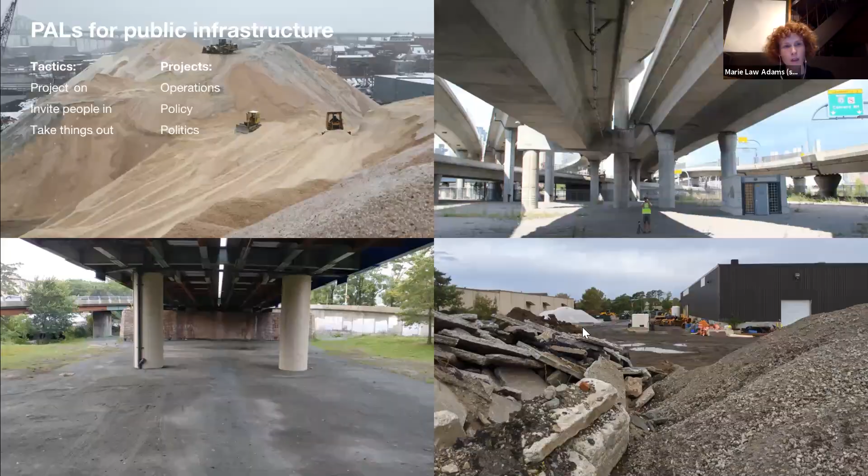Fast forwarding to today, Chelsea Creek is actually still represented with a series of dots, just a lot fewer. These are GPS coordinates also used for navigation, but what they're doing is outlining the profile or footprint of a piece of large scale infrastructure. This is a federal navigation channel, designed to support global scale ships arriving in Boston Harbor, bringing goods like petroleum, road salt, and produce products to the regional community — an example of regional or even global scale infrastructure.

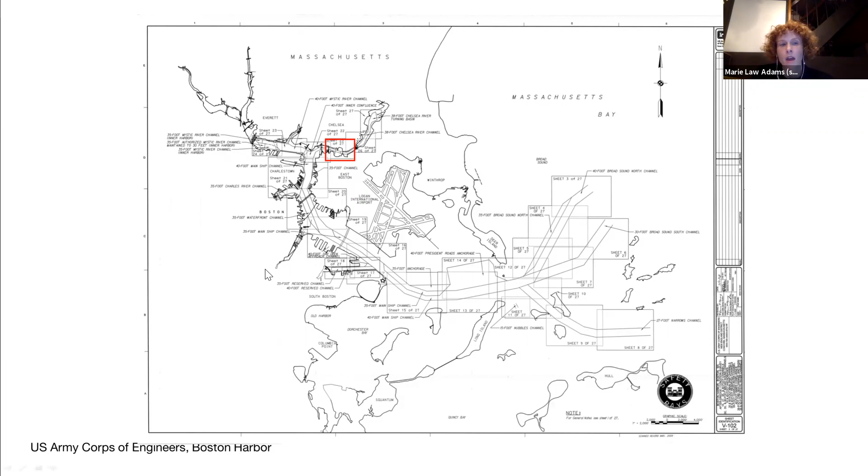This is what Chelsea Creek looked like in the 1950s. Jumping back to more contemporary times, this still has an imprint in the way Chelsea is today. It's the most densely industrially zoned municipality in the state of Massachusetts, with about 35,000 residents and a very large number of immigrants from Central America. It's the second most dense residential municipality and the smallest as well, at 2.2 square miles. Quite tiny. You can see in the image here, all the black figure is the industrial landscape, characterized by wide expanses of asphalt and warehouse buildings, and it entirely runs the edge of the Chelsea waterfront to this day.

Reflecting that either/or attitude I mentioned a couple minutes ago, we found this quote in the local paper years ago that said, 'I have a feeling I'll find out soon what Chelsea will stand for the next 100 years. Will it be residential or industrial? I hope you choose wisely. I already have one bag packed.'

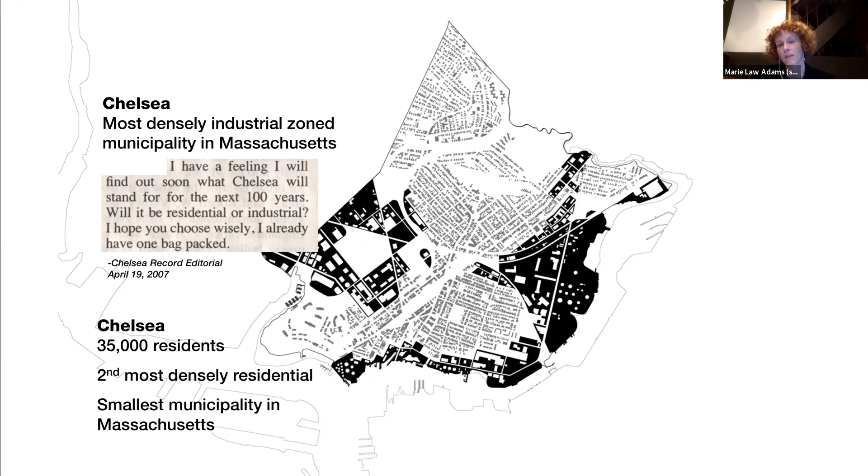This mentality that it could only be one thing, that the public good was really incompatible with industrial activities, is actually reinforced through policy decisions at every level.

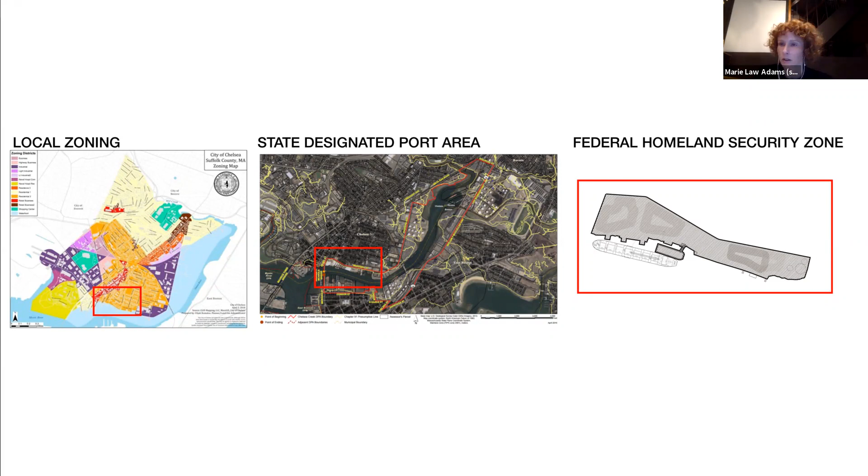In Chelsea in particular, there's a conflict between local zoning, which excludes all industrial activities from the waterfront, and the state, which only allows marine-dependent industries there. The two completely contradict each other, creating a condition where the waterfront is undevelopable. Federal homeland security adds another layer of impenetrability on top of that, which I'll go into later.

What that results in is a waterfront resource that looks like this—it provides nothing for the local community. It's kept in a holding pattern of airport overflow car parking and rental car parking lots, because these uses are a loophole to get around the zoning conflict between the state and the municipality. This isn't doing anything for the public. It's not a heavy industrial use, but it is separating the community from the waterfront.

Narrowing in on a facility we've been working with for several years in Chelsea, you see in the background two really large piles of road salt used for de-icing in the wintertime in Massachusetts. The state uses about 1 million tons of road salt every year for de-icing, distributed across the entire state to local municipalities. In the foreground, you can see a Panamax ship passing through a drawbridge.

These ships are 900 feet long, the size of more than 3 city blocks in Chelsea, which is a very old city for the United States. It's something that completely dwarfs the scale of development around it.

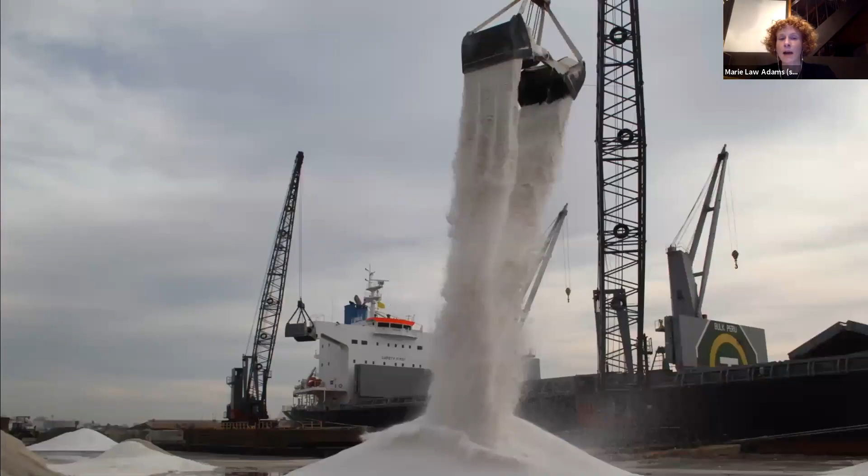Here's the ship again passing through the drawbridge, being tugged into the berth at the salt terminal. This shows the process of unloading the ship—cranes take the salt out of the holds and drop it onto the dock, creating an extraordinary landscape, sort of a moving mountain of minerals, which you can see here.

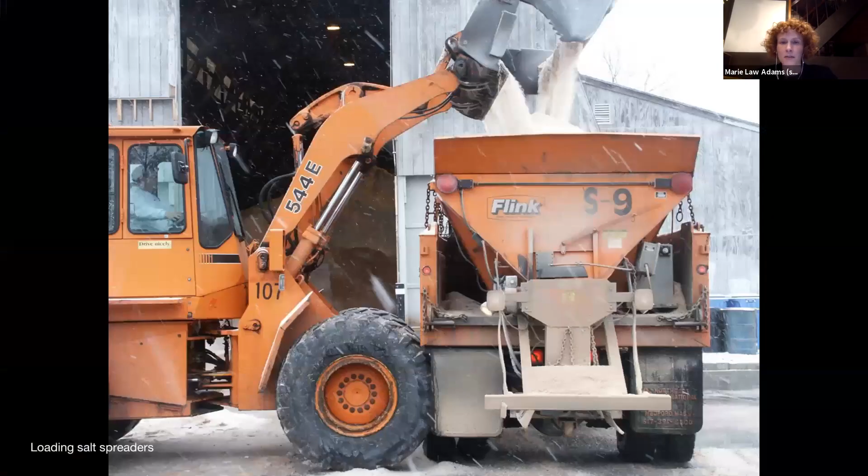It's a very fluid thing that changes with the weather—with every storm it either rises or falls. This salt is then stored and put into trucks that go out and spread it onto the streets during winter storms.

When my partner Dan and I first started working in Chelsea, we realized this kind of industrial operation really heavily shaped the community's relationship with their waterfront. It had a big impact on how people live in their public realm, but there wasn't any dialogue between the industrial uses and the local residents.

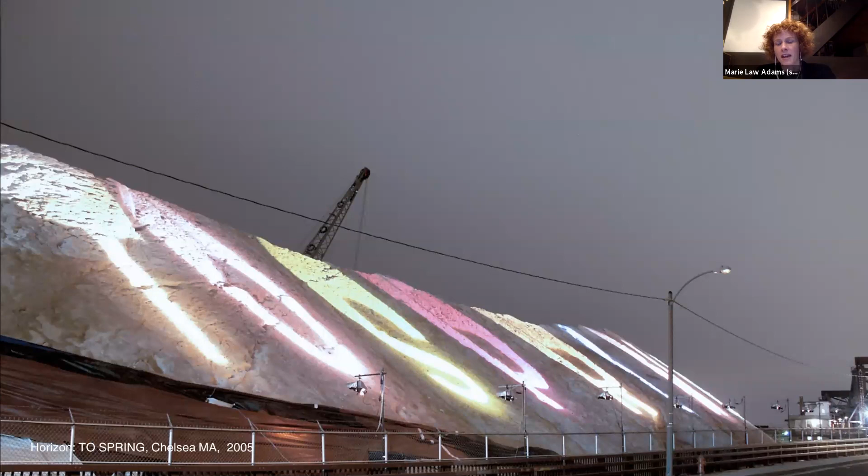Something that anybody could engage with. And then you see here the kind of 'to spring' projection, marching on to spring, which disappeared after a late snowstorm—kind of just demonstrating that kinetic nature of the salt pile.

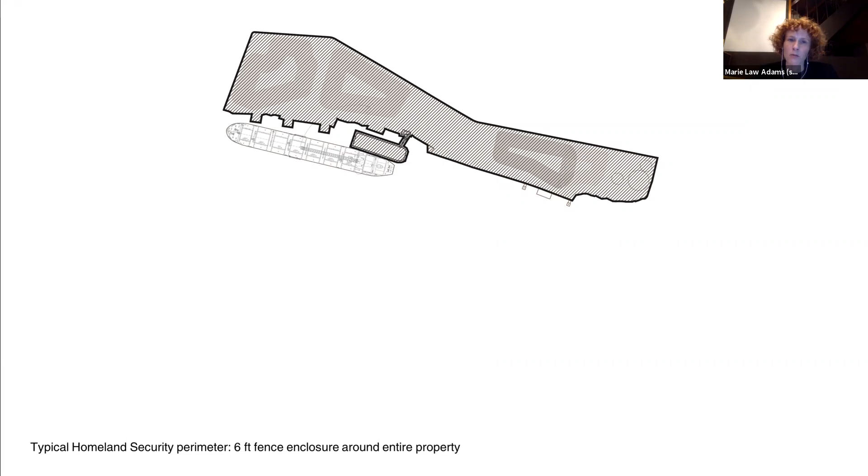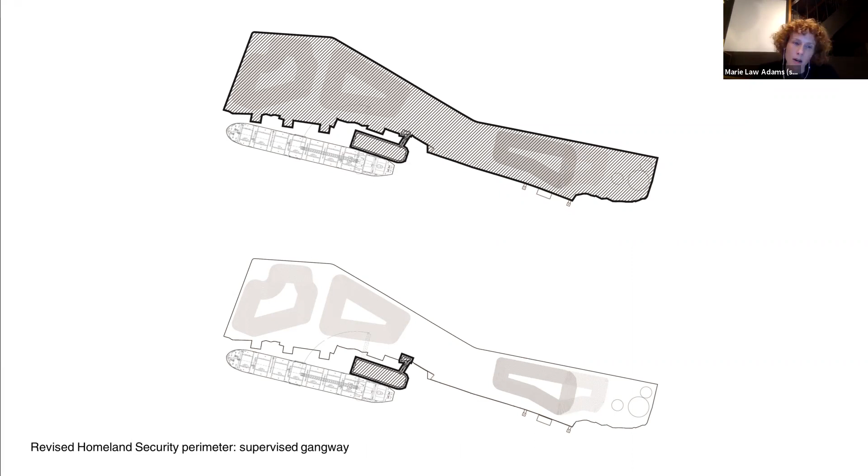So we worked to really target: what's the real security concern? We were able to reduce the security perimeter, which would have been a 6-foot-tall fence around the entire facility, to something about 1/25th the size, which opens up almost 10 acres of new space on the waterfront that anybody could walk into. There are still gates and fences, but it creates the possibility that the public can occupy this waterfront. These are the drawings we used to negotiate with Homeland Security to do that.

This is the design intervention: incredibly modest, a shed with a window in it that allows a security officer to view the gangway leading to the ship, and that's it. All they need to do is monitor who's coming on and off the ship. That then opens up the entire facility for different uses, making the dock itself available for public use.

So there was a high school senior dance that took place on a harbor ferry one year, a teacher appreciation cruise another year, and the local Boys and Girls Club can come and visit to see ships docked at the waterfront.

So all of a sudden, opening up this space for something that the public can take advantage of when they live in such close proximity to it.

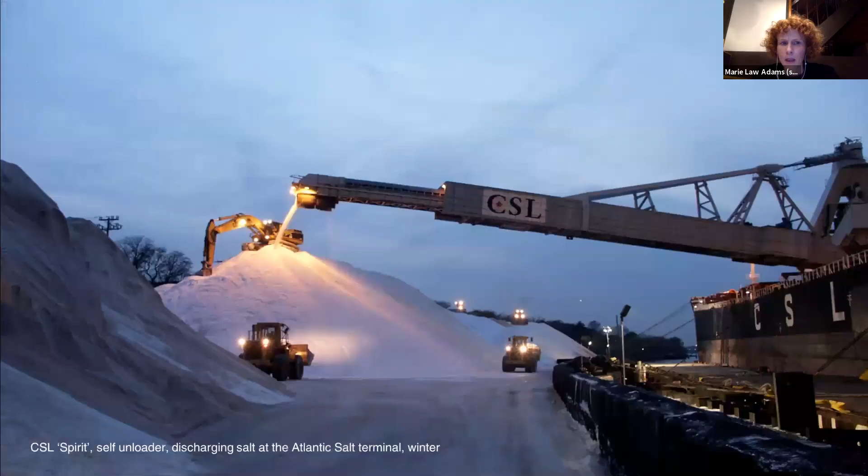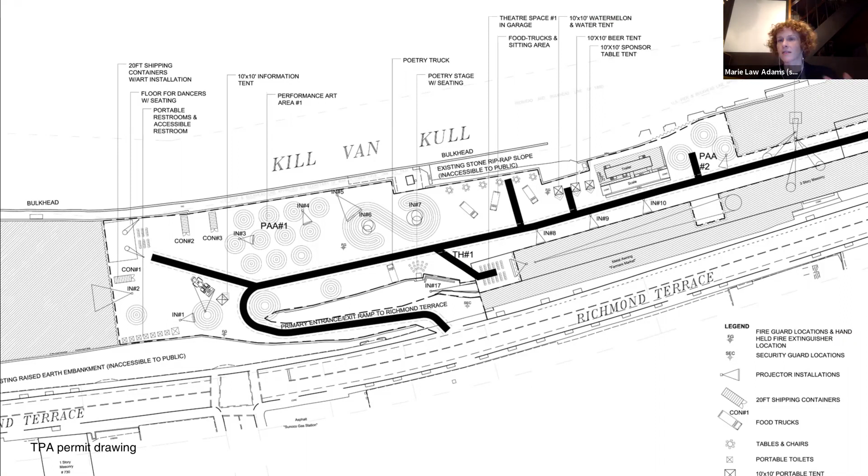So one of our early projects that became an ongoing event, which we worked on with Staten Island Arts, an arts organization in Staten Island, was to design the Lumen Film and Performance Art Festival. We took advantage of the seasonality of the industry to introduce new uses and activate the space in the summer months. This is a permitting drawing showing different configurations of salt piles and art installations that happen at this one night event, which we did for multiple years.

One of the first things we do is account for the scale: it's a half-mile long facility, a really, really large space, and it's quite dark at night. It's not designed for typical urban activities as a working waterfront. So we try to highlight the space with light and create a way of going through it, using lighting cues to illuminate all the different industrial buildings and artifacts like the crane you see here, and the smoke tower.

Sometimes the artists themselves begin to incorporate their work with the industrial equipment. This is a front-end loader being used for a projection. We work with the salt terminal to bring in shipping containers that serve as smaller scale galleries and more intimate spaces for screenings. Even the industrial equipment itself, when illuminated, starts to become things that people interact with—they take pictures with them, they climb on them. It's an opportunity to get close to things that a lot of people don't get to in their everyday life.

We had been doing this event for a couple of years, and then one summer there hadn't been very much snow at all, and actually there was still quite a bit of salt left on the dock in the summertime. That caused us to change the approach—it became more than just creating an infrastructure of new lighting to invite people in and allow for art installation work. We actually started to use the salt itself as a material for the art installations.

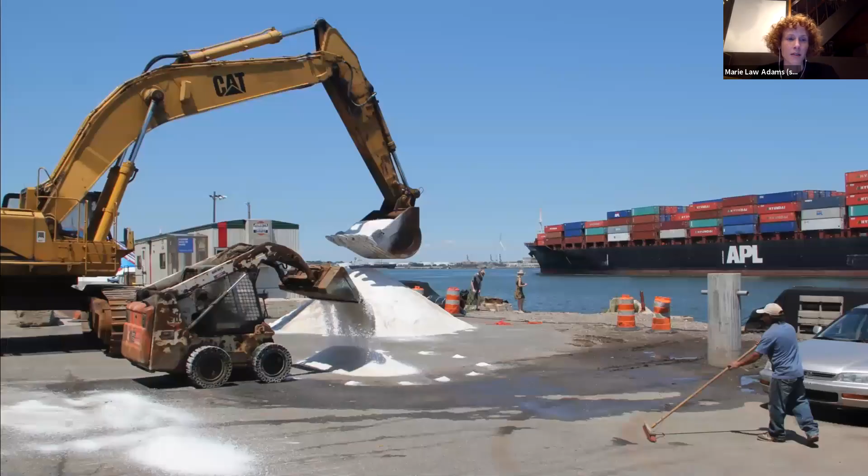We worked with the labor force of the salt terminal to lay these shapes out on the ground—they used little hand piles of salt to mark the areas, then built them with the equipment they use in their day-to-day industrial activities. The artists themselves started to work with the machine operators to create site-specific works incorporating the salt. You see an artist here directing a couple of the salt dock workers to sculpt a pile.

Here we have an artist who used the pile as a pedestal for a performance. In this case, it's used more as a gallery and performance space to create an enclosure in an otherwise really large dock.

Some artists also incorporated the salt as a material within their work, like the one we saw where the artist was working with the dock operators, using the material as a projection surface. By the end of the night, the piles themselves get beat up as people climb on them to view the works from different vantages. It's a very friendly material to climb on, and kids come in and make their own installations in the space.

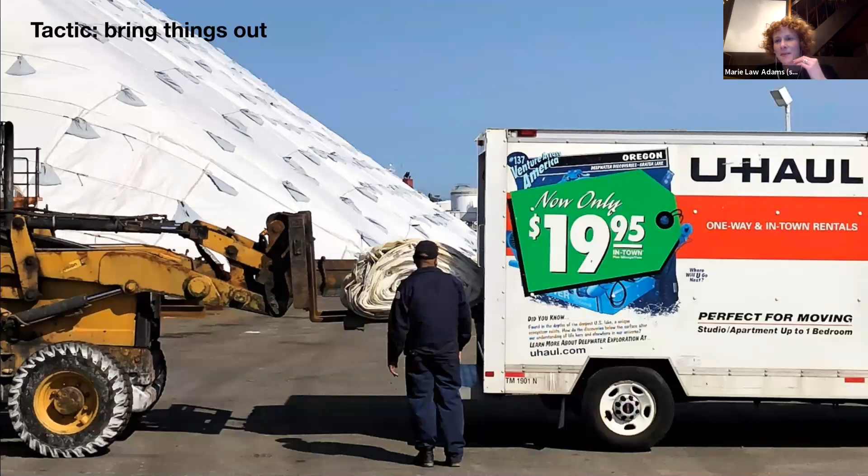The next tactic I'll talk about is bringing things out. This was a fun project we did a couple years ago. We were invited by the Architectural League of New York to design the environment for their Beaux-Arts Ball, a one night party event in New York City where all the local architects gather. Every year it's in a different location, and the installation lives for only 4 hours—a very short-term, fast installation. The theme this year was called Vector, about flows of materials, information, and people.

Our work fits into this category because a lot of what we do is with logistics and that sort of thing. So this was the building we were given as a site.

It was really just characterized by a 300-plus foot long hallway. You can see the beams on top of the columns there—that's a gantry system that used to be used to unload rail cars. This was the Brooklyn Navy Yard, which used to be a more industrial building and is now used for other things.

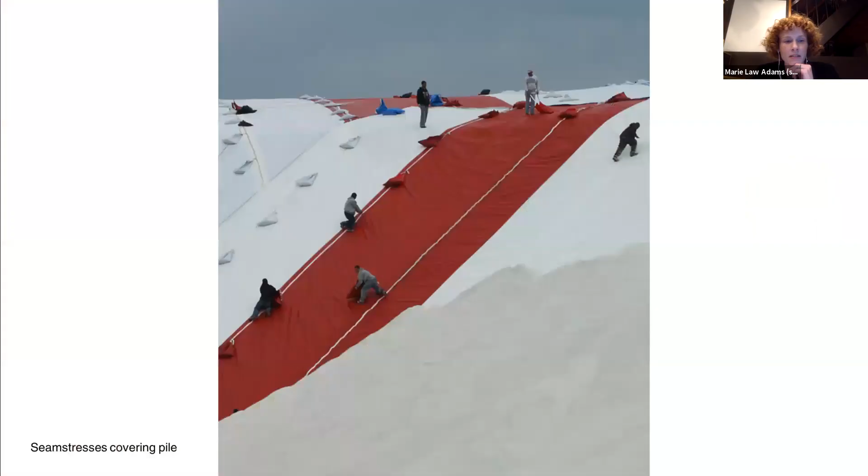This is what we looked at for the installation. We were inspired to use the industrial materials we use in our work with the salt terminal, specifically the tarps used to cover the salt in the summer months. You see here seamstresses who come from all over the country every summer to stitch by hand with handheld sewing machines the tarps that cover the salt when it's not being used.

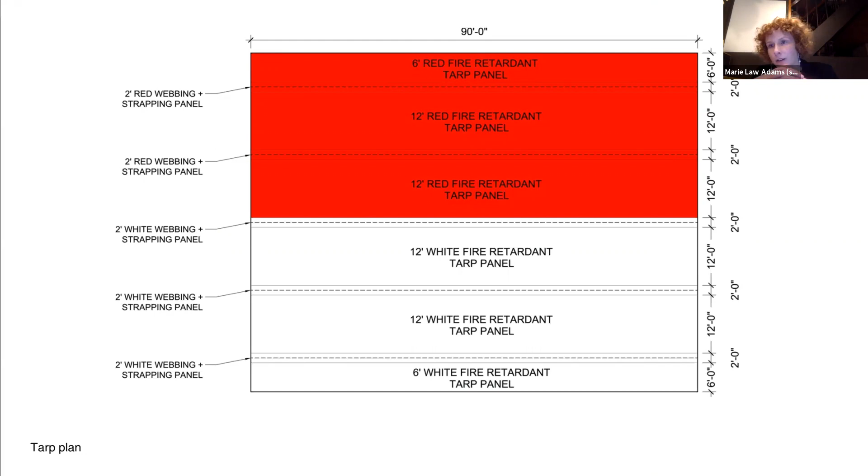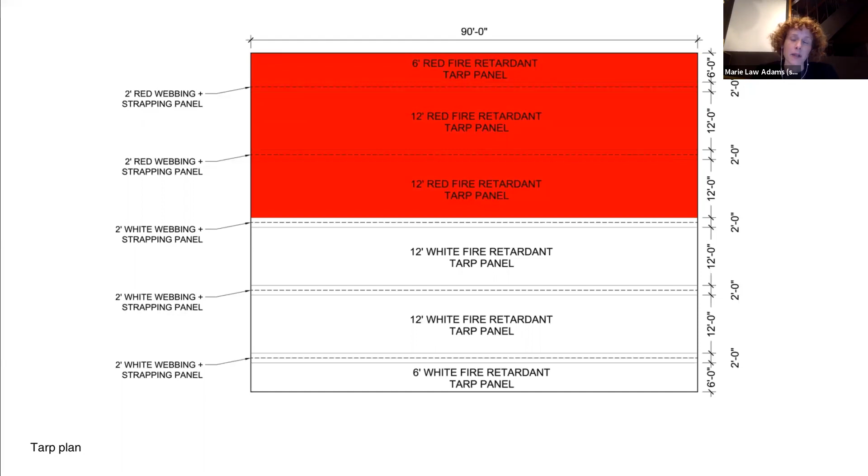We worked with the salt company to special order tarps in the red and white colors they often use. We were able to specially order fire retardant tarps, since these same materials are used for covering coal piles as well as salt. We had to order them half the size they typically use because one of the biggest hurdles for us in doing this installation was the sheer weight of the fabric itself—they were 300 pounds each when rolled into a bundle like this.

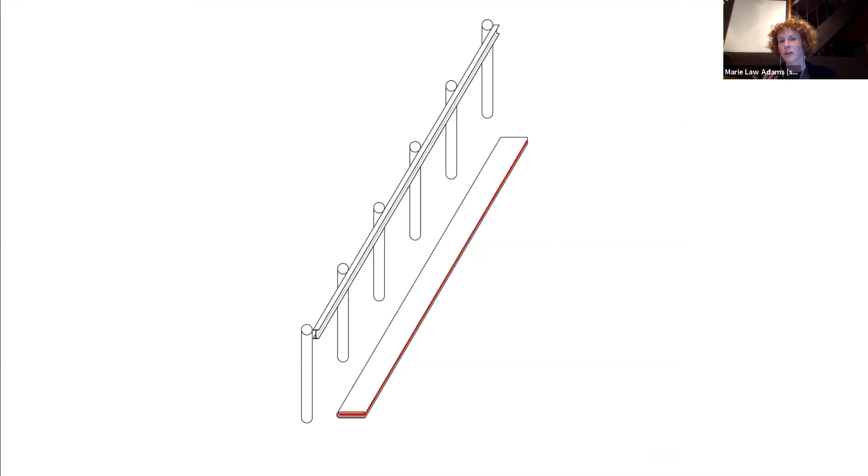So we used large scale models in our office to understand what shapes and forms could be used with these tarps if brought into this really long hallway space, but also to physically figure out the logistics of getting them in and moving them around without the aid of the industrial equipment typically used in the process of tarping a pile.

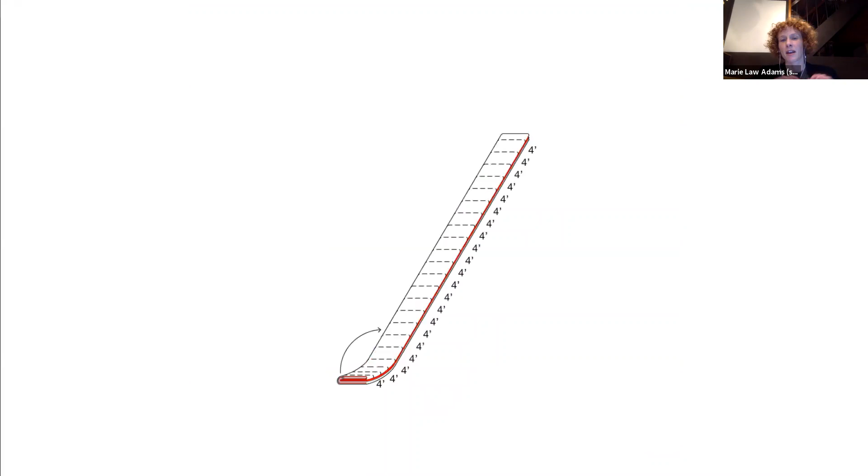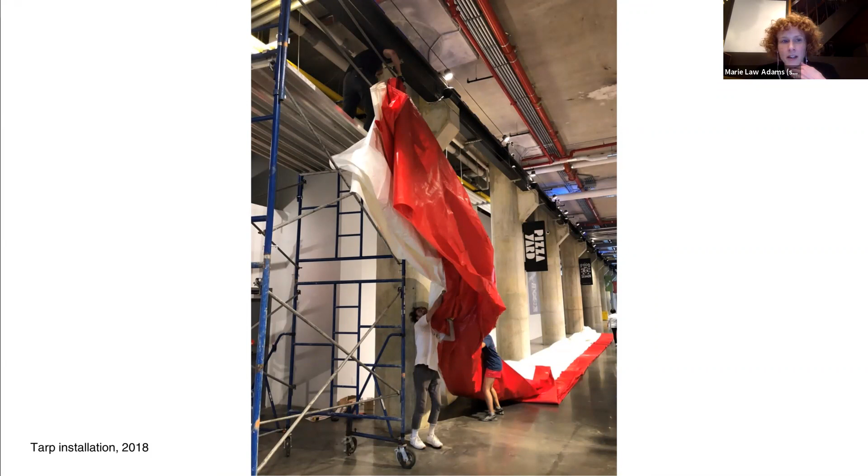We came up with a strategy of how to unroll the tarp down the hallway, unfold it, and lift it piece by piece, attaching it to the gantry system to create a new context. You see the installation process here—some of our team trying to hoist the material up.

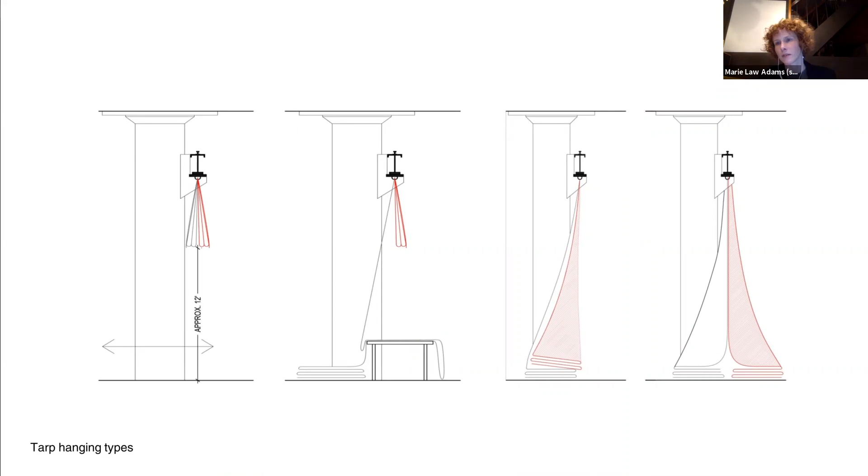We had this hanging detail that connected the tarps to the beam of the gantry. The design became about developing a vocabulary of different ways of hanging the material that responded to the constraints of the space, in terms of life safety systems—all of the alarm strobes, annunciators, and egress doors had to remain functional and visible.

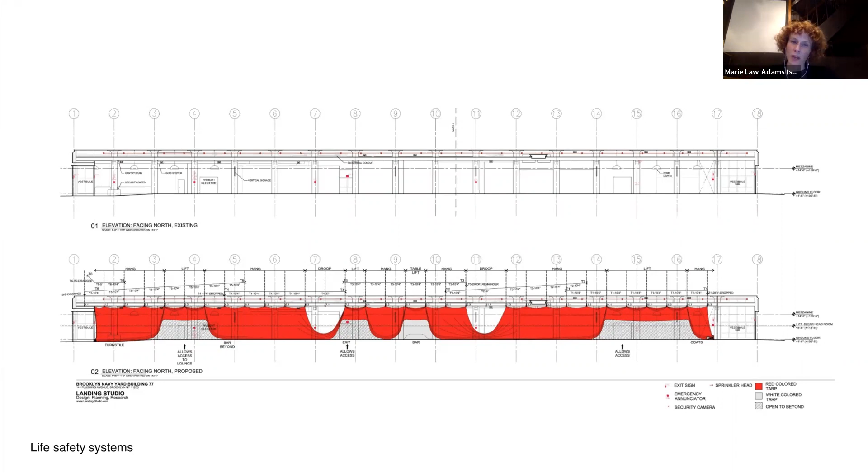And we really liked the red and white in the sense that it could really take different qualities of light and create a whole kind of glow in the space.

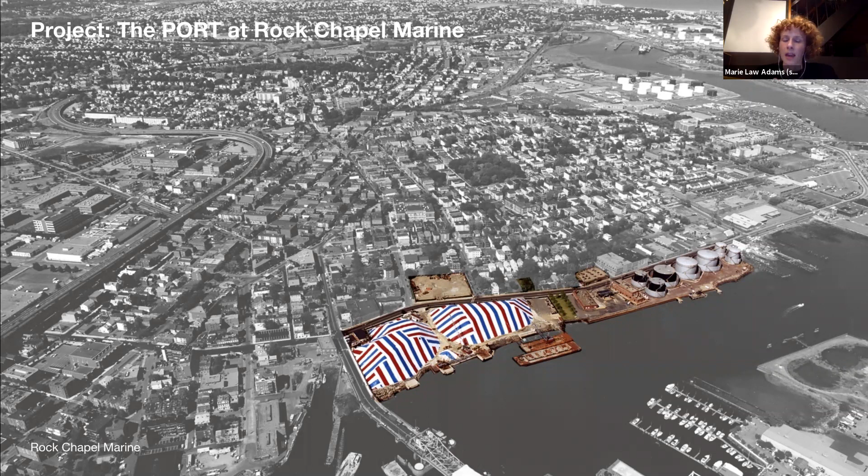The kind of project that we were approached with at this time was to help the salt company design the expansion of their operations into this oil terminal here.

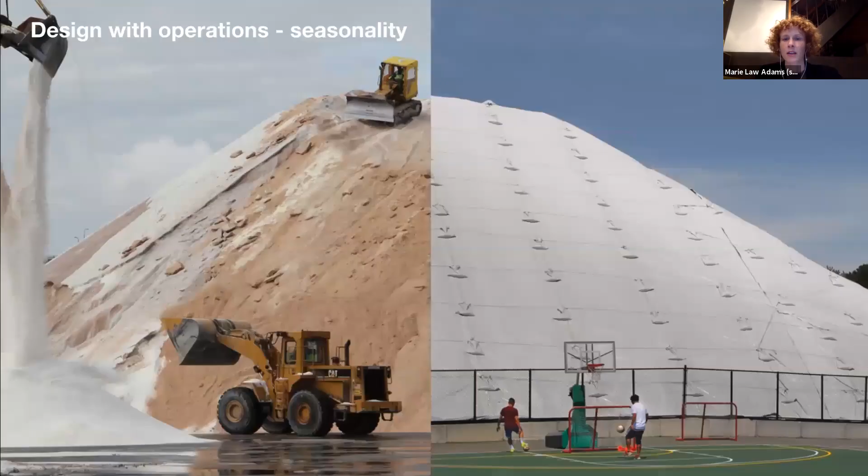So basically the proposal became, can we create a facility that is a salt dock in the winter months, and then in the summertime becomes a public recreation and event space. So it's a dual use here.

And so the design intervention in a sense is actually very, very simple for this part of the project. It's simply striping a paved landscape to be able to suggest the different types of uses that it takes on in the summer months.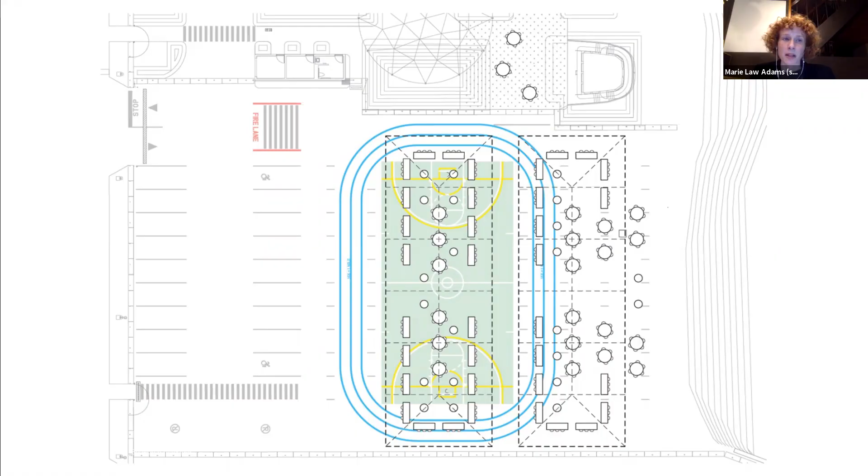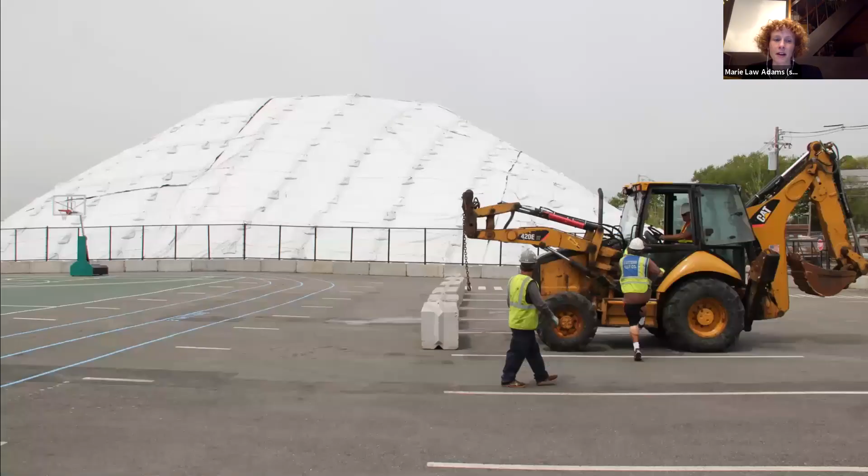In May, basically the agreement is that the salt company moves all of their salt off of this basketball court and track and event space, and moves a fence back. The court is restriped and repainted every summertime, and then used by the public.

And this is a picture of it the first summer that it was opened. It sort of met a big demand for basketball. And as the kids are playing out there, there are ships passing by. They're right on the waterfront with the breeze from the river and everything. So it's a really interesting place to bring that kind of recreational activity.

And this was done through, you know, the design itself is very simple. It was done through the design of a policy more than of a physical space.

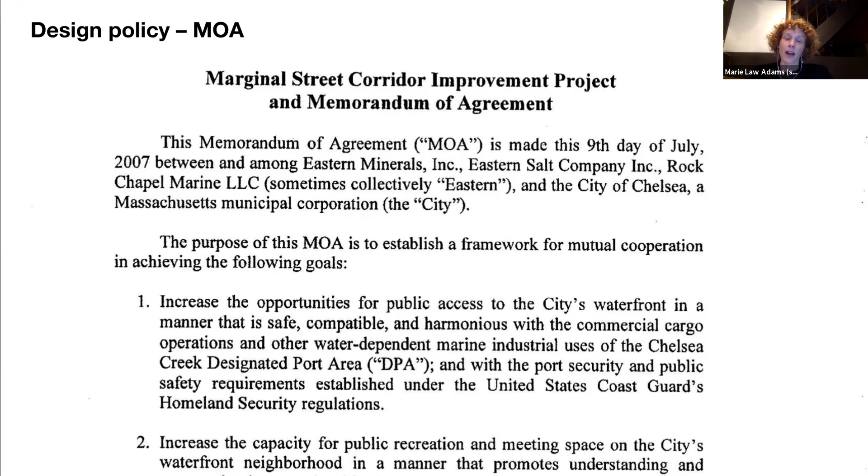So we worked with the city to develop an agreement that this new basketball court space would be recreated every year, so that they have a long-term contract that says, if you're going to redevelop this as an industrial terminal, we want to continue to get the public recreation amenities every summertime. And so it's made concrete by this agreement here.

And in addition to that, we also worked to design how the salt industrial activities work so that they are better for the local neighborhood.

On the left, you can see a series of different salt piling strategies that are used to prioritize views from the local streets to the waterfront, so that rather than getting that Northern Irish wall of salt in front of you, we look for ways to keep those view corridors clear and allow for people's views of the waterfront to be maintained.

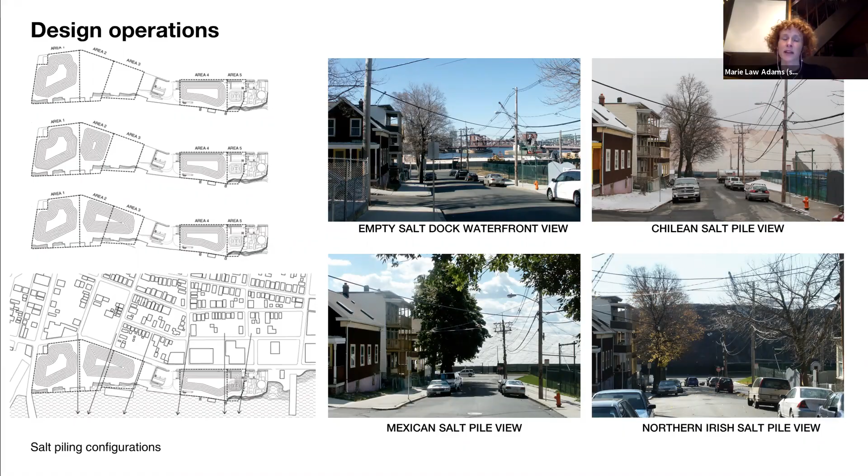And then there were also other longer term tactics that were used to develop more year-round recreational access to the waterfront.

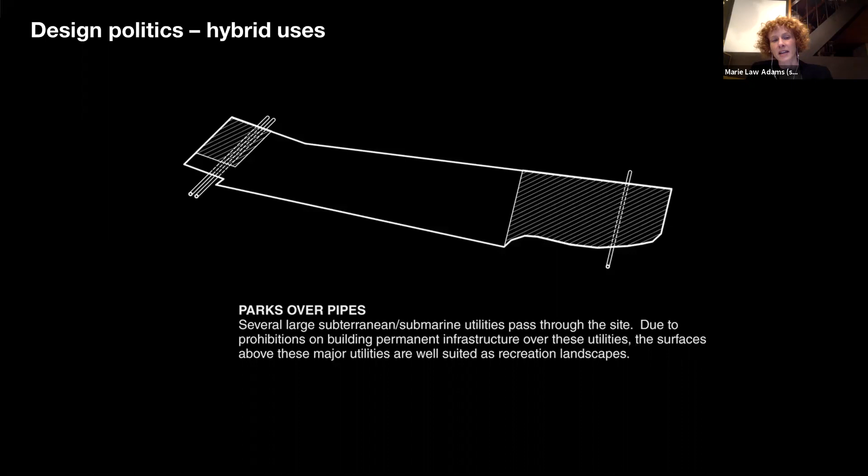Those took advantage of a really close reading of the physical architecture of the dock facility. Again, this is a lot of hidden infrastructure, a lot of industrial or waterfront sites are this way, but we found that there were two major utility lines running underneath the dock. Those areas couldn't be used for stockpiling salt because that could potentially damage the utilities. So those became great locations to introduce parks or public access to the waterfront.

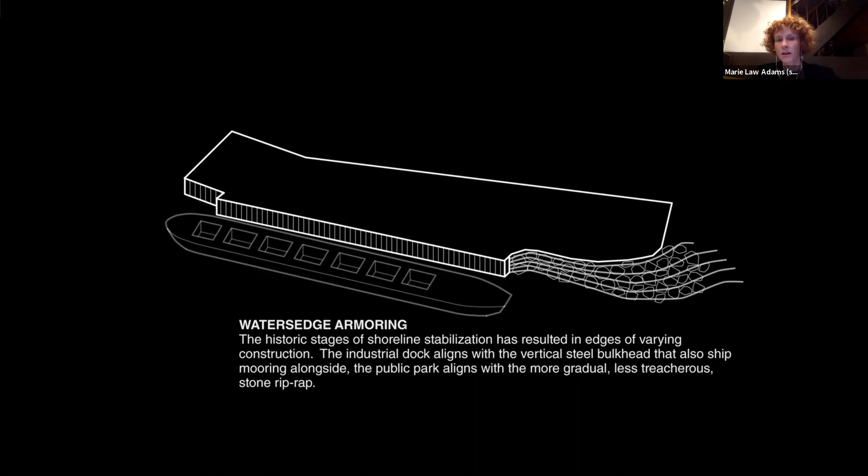And then the nature of the water's edge was something that we looked at, where there was a more gradual slope to the waterfront. It was more safe for public use, whereas the steep steel bulkhead is much better for berthing a barge. So we started to rezone the space in a more variable way between recreational uses and industrial uses based on some of that analysis.

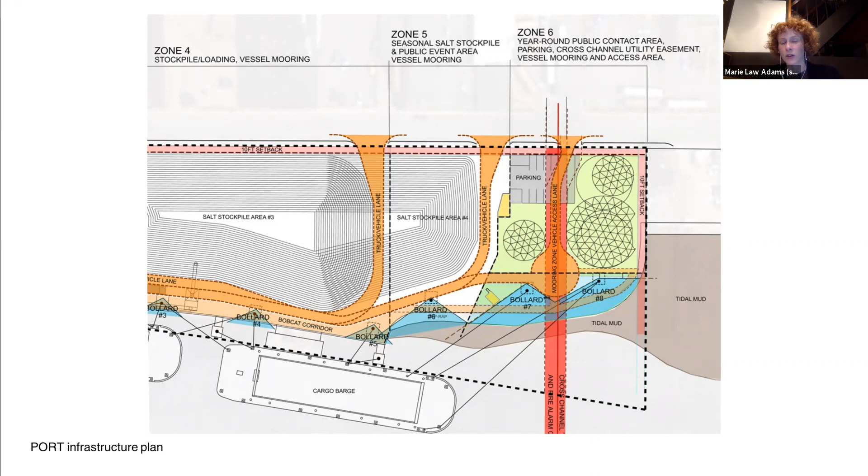And we ended up having to develop almost a dual drawing set where we needed to demonstrate to the state regulators that all of the industrial functions could still be performed in these spaces, that we weren't taking away the industrial capacity that was protected by this state law.

And at the same time, we were also supporting those things in a way that could be utilized by the public. So integrating things like ship bollards in the middle of planters that were used as the public access space to the waterfront. And those two things are compatible uses, they don't really affect one another. In some ways, it's just designing the negative spaces of the park to be able to support industrial activities.

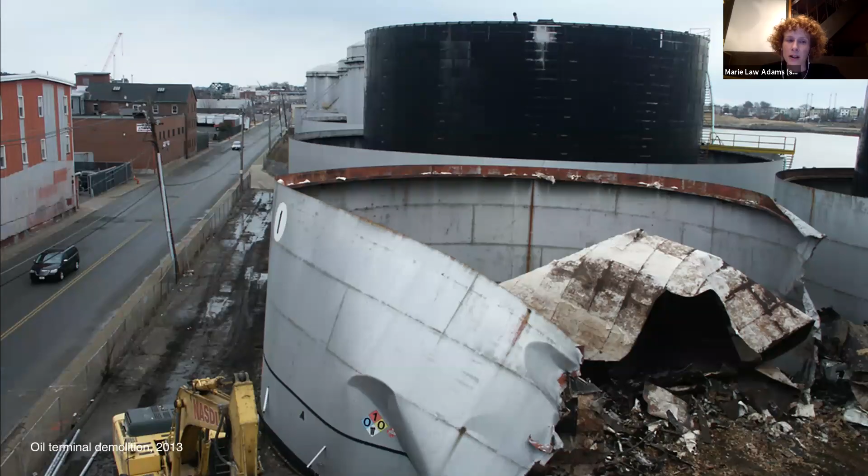And so the oil terminal was demolished starting in 2013. We did a series of lighting installations at that time as well. This projecting tactic announced and initiated a dialogue again with the neighborhood that this space, which had been separated from them and a barrier to the waterfront for generations, was finally going away, and that this space was going to be opened up for public use.

And so as the oil tanks themselves started to go down, we projected the word goodbye on the tanks, which disappeared as the tanks went down.

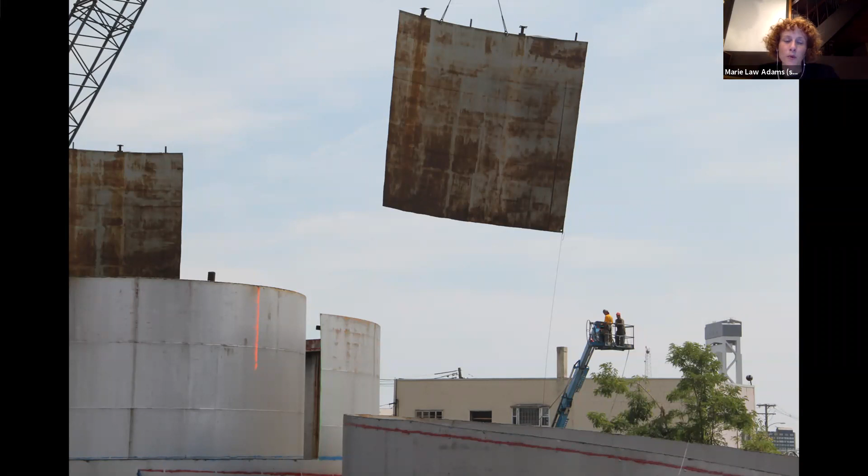And then we went to really look at all of this material of the oil terminal, and came up with a demolition strategy that also reused a lot of the elements for the public park. So this is one of the roofs coming off of the oil tanks, and then the panels getting removed from the dike. This is my partner marking the line for what would become an amphitheater that was contained inside of an old oil tank dike.

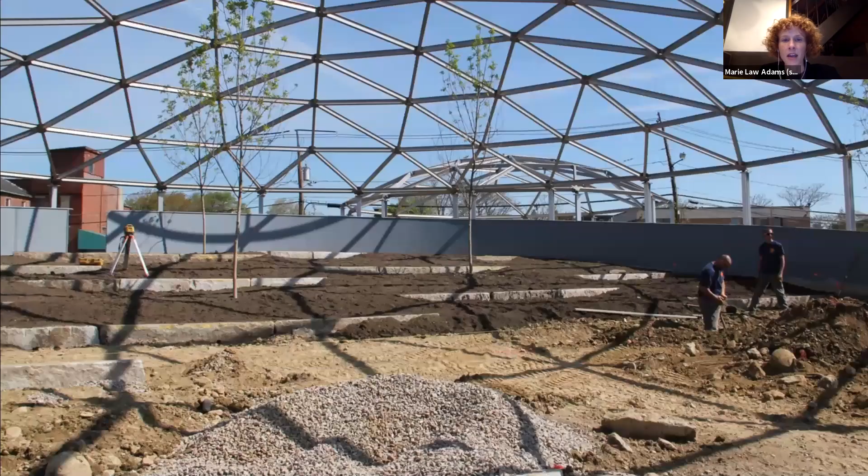And then that's a picture of it during construction, and then more recently here. So, trying to utilize these industrial artifacts to create a sort of memory of the place and a character to it that we probably wouldn't have been able to do otherwise if we were just designing this park space from scratch.

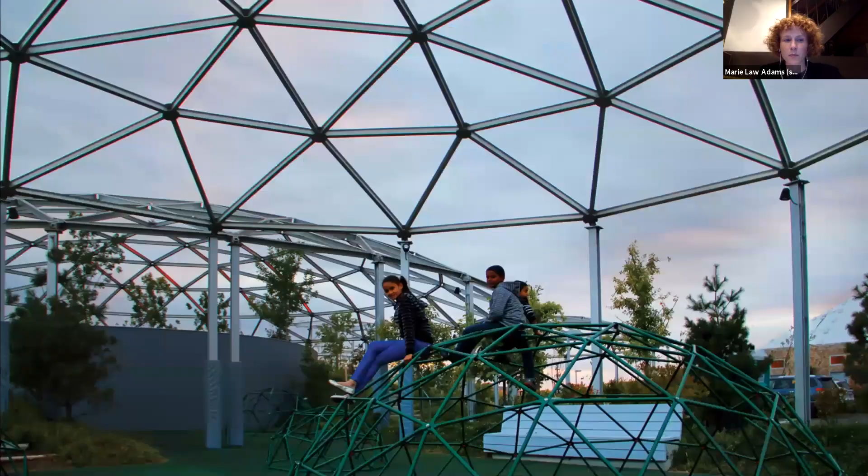So introducing geodesic domes below the industrial domes for kids to climb on. These were foam cannons that were used to extinguish fires in the oil terminal, which are now used as spray fountains for kids, for water. And this was a truck loading rack that is used as a stage for theater performances.

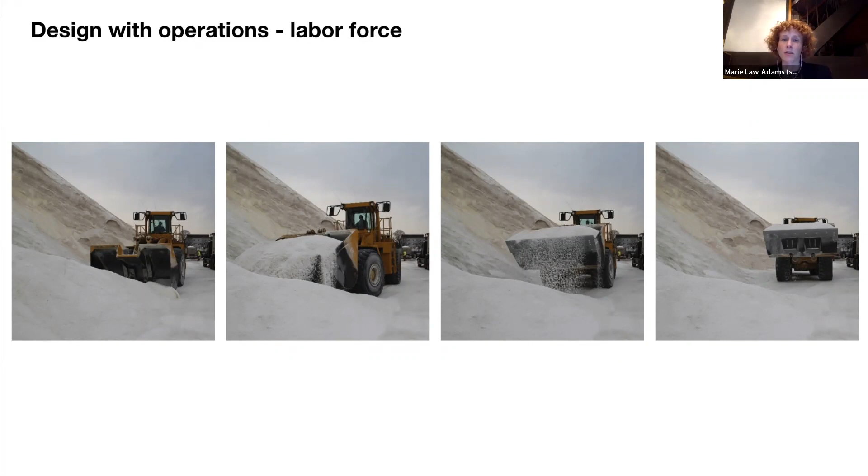And we find that these types of projects are really made possible by working with the industrial operations. In this case, we worked with the labor force of the salt terminal to actually build the park. This works quite well for them in the sense that, again, the seasonality, their workers are really busy in the wintertime with the shipments of salt, but not as busy in the summertime. And so then they can take on other types of projects like building and maintaining this public access landscape.

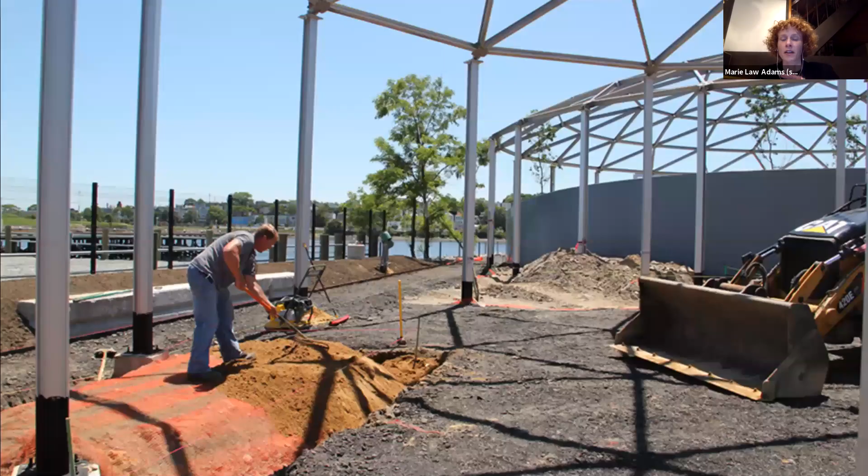Because we were acting as the general contractor for the project ourselves, we worked entirely through construction sketches to build it—basically creating sketches of what to do that day, handing them to the dock workers, and talking it out on site about how to build the space. That's how it was created.

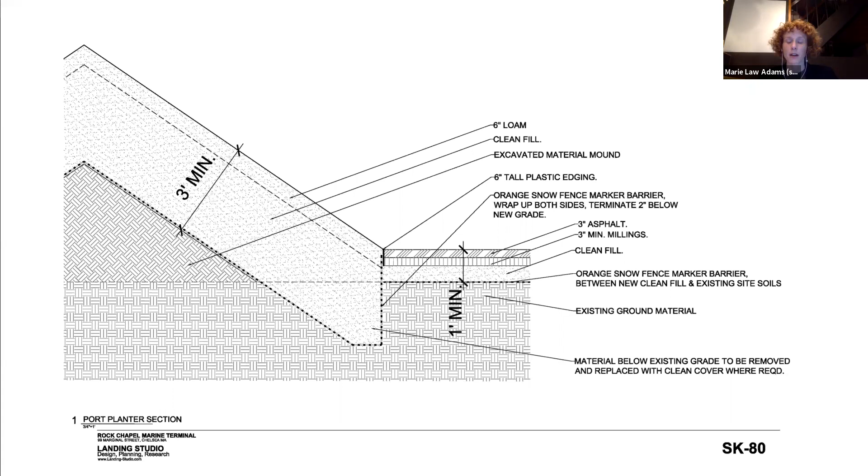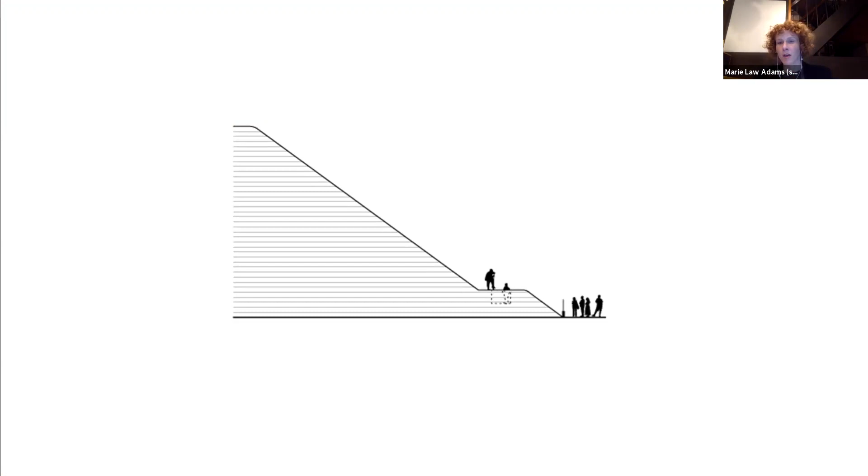This is a performance of Hamlet doing his soliloquy on a miniature salt pile. We worked with the dock employees to come up with a grave for Ophelia in this production, digging into the salt pile—you can see that being performed here.

The next summer, for A Midsummer Night's Dream, an artist created a stage set scaffold that used salt as one of the materials.

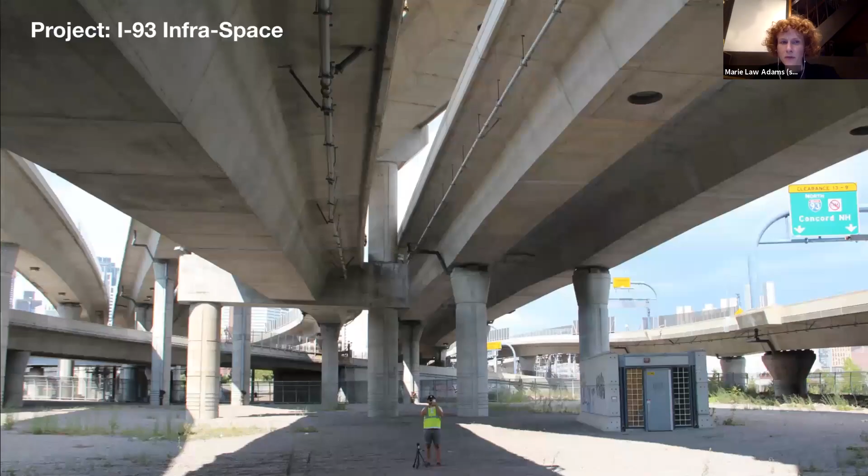I'm going to jump over to another project, the I-93 Infra-Space. This is an under-highway landscape.

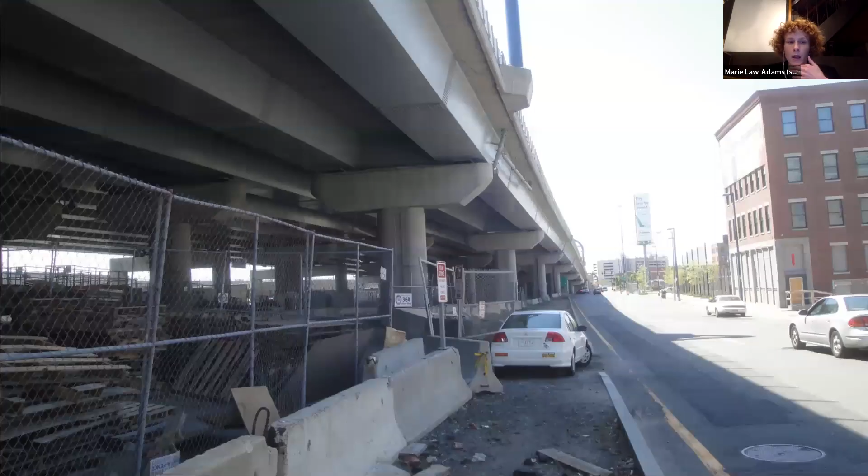You can see on the right-hand side there's new development happening right up next to it. This is what the highway looks like at street level.

It had been used for years by the state's Department of Transportation, which owns the infrastructure, as a construction laydown space. It had become very unkempt, and there were crimes happening under there.

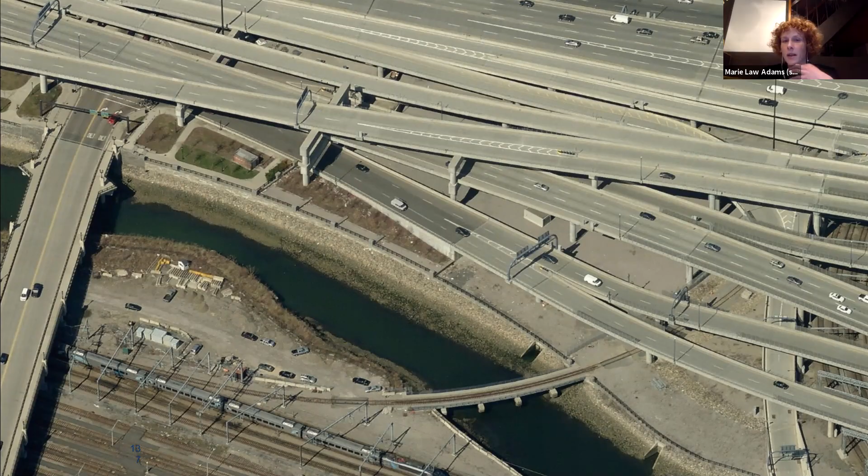When we started working on this project, we had to be creative to find a way that a state transportation agency, who was the client, could essentially make something that is, by all other names, a park.

That became the entry point for us to be able to create essentially a park landscape underneath this overpass, as a way to create connectivity and bring in new uses.

Our concept for the project was to multiply this particular side of the transportation agency's mission, bringing in as much infrastructure to support pedestrian and bicycle transportation as possible.

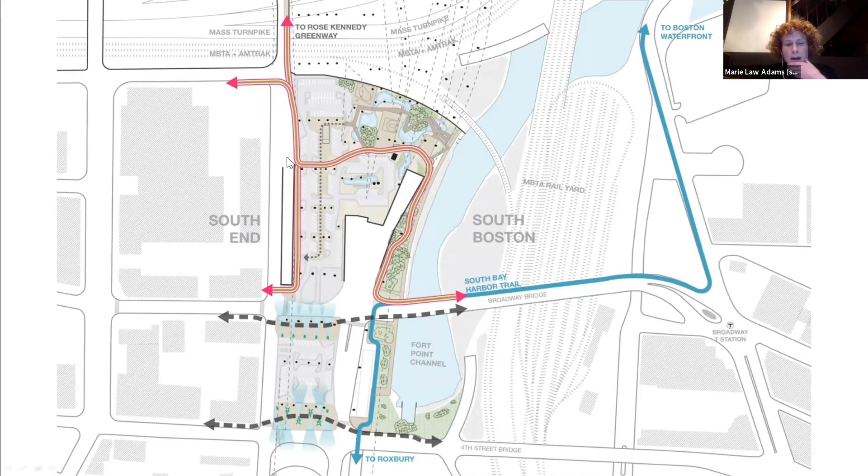We did this by introducing a new shared-use pathway that connects through the landscape, which you can see here as the main circulation spine. That's an image of it entering the site, with the water on the right-hand side.

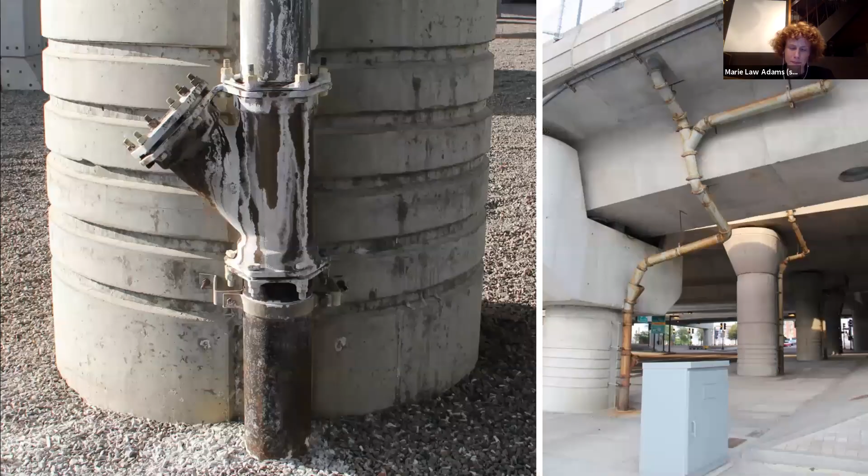We also had another type of transportation infrastructure to support pedestrians—a more meandering boardwalk meant to create different viewing relationships through the ramp structures, elevate you into the canopy of trees, and give you a different sense of the space. The other part of the project was stormwater management.

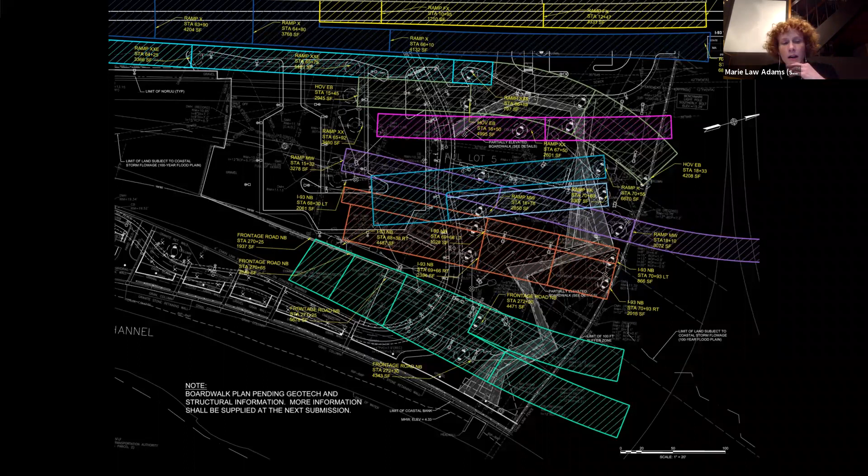Part of what the transportation agency can fund is anything that supports their own infrastructure. In this case, doing better stormwater management through the landscape was a way of bringing in a park by calling it infrastructure. All of the stormwater drainage that used to go directly into the harbor, we rerouted. This is a diagram of all the catchment areas that land on the highway above.

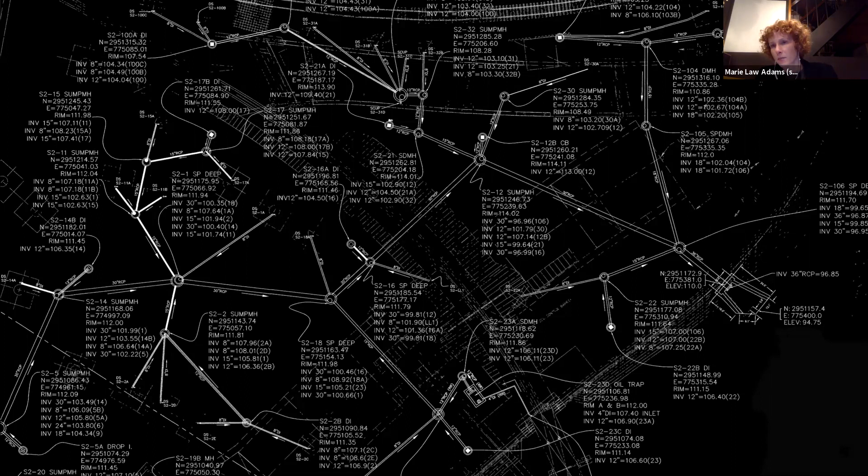Typically it would just go into an underground network of pipes and then immediately drain into the harbor, bringing all of the pollutants with it off of the roadway—any kind of oil spills, sediments, and so on. So we look to divert all of that and bring it into landscape and stone systems, to filter and treat the water before it gets into the harbor.

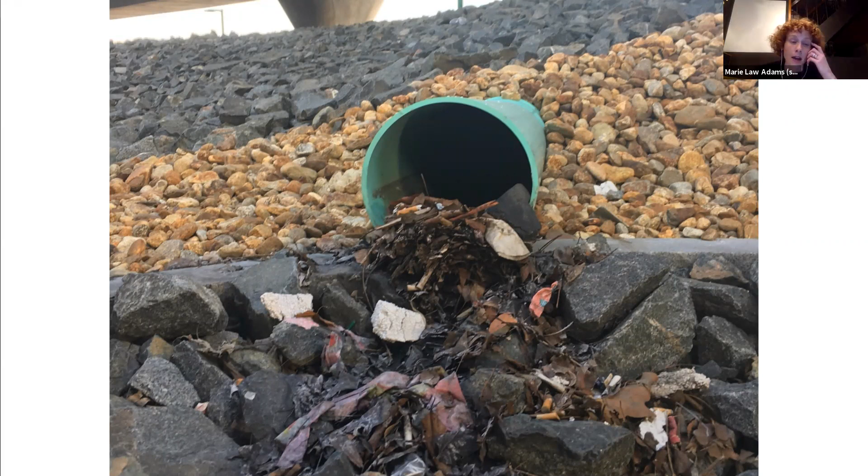But then also to use that treatment landscape as an amenity, as a way of bringing green space into this highway landscape. And something it also does is make legible everything that's coming off of the highway that would otherwise go into the harbor—it becomes something you see in the landscape here. So the pipes are visible, and all the trash and debris is present and becomes something you see in the park. That's not a bad thing, because now it's not going into the ocean, and it's in a place where it can be cleaned out and maintained.

When we started the project, we had some conversations with the transportation bridge engineers who do this inspection work. They said a real problem they had was that the site had been just covered in gravel and left undesigned, and their trucks would always get stuck, so they wouldn't be able to perform their maintenance or inspection efficiently.

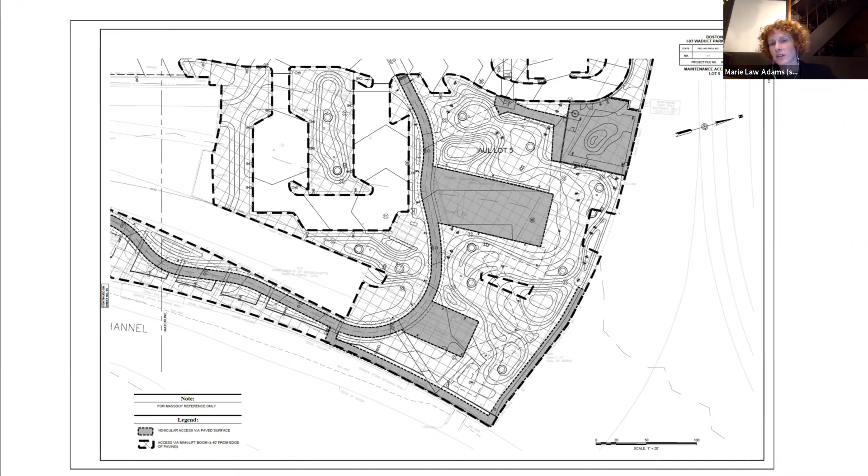So we started to design a series of what we called maintenance access plazas, distributed throughout the park space, which were essentially flat paved areas that could double-function as recreation spaces. They were sized, in this case, to be a basketball court. Another one was sized for a dog park because that's what the community wanted developed there. But they could also support, at the time of inspections, the movement of this equipment into the space, so they were all designed with that reach radius you see in the image above.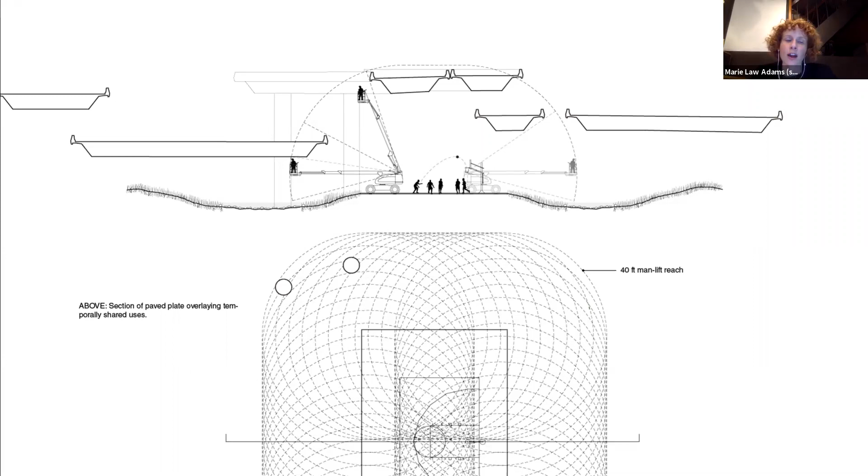This is a picture of the basketball court area actually getting used for other types of fitness.

This all got reinforced through what we'd call a design policy for this project, because the project initiator was a transportation agency—who can't maintain parks, can't program parks, can't bring activities into them—they needed a private partner to activate the space. So this lease was written to require that the operator of the space puts on a certain number of art events throughout the year. A lot of careful attention was paid to making sure the space would be used for many different kinds of activities, to bring people in rather than keep people out, which had been the policy of the transportation agency for years.

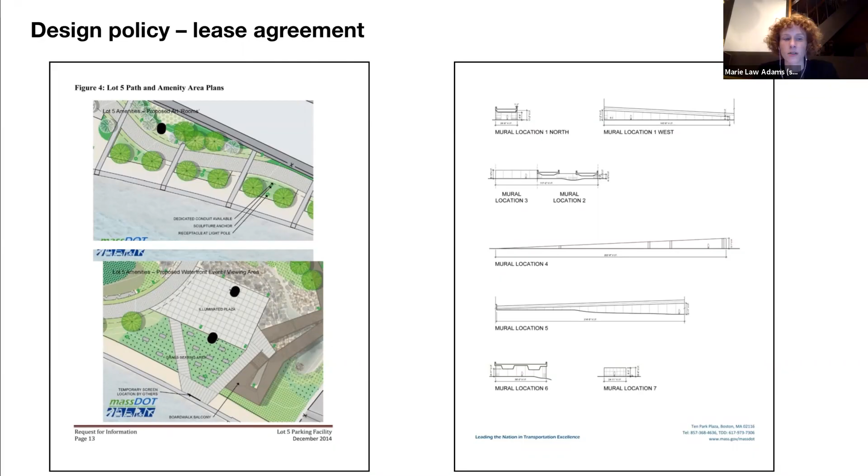That's really transformed the area into something more like an outdoor mural gallery, and the private operator continues to add to it year after year.

I should say the financial equation of this is that the lease operator gets revenue from parking facilities designed as part of this project, where you have a much more regular bridge structure, whereas this park space occurs where the highway ramp structure is very irregular and didn't lend itself well to parking use, which was originally what the transportation agency had wanted to do here.

Something we find really interesting in this case is the possibility, when working with such a large bureaucratic agency, of working within their systems—in this case, their specification system. The State Transportation Agency does a lot of the same type of construction over and over again, so they codify their specifications. As soon as you get a design approved into their specification system, it can be used on any project. So in some ways, the real hurdle in this process is that initial act of design, but once you've done it, it can be redeployed anywhere.

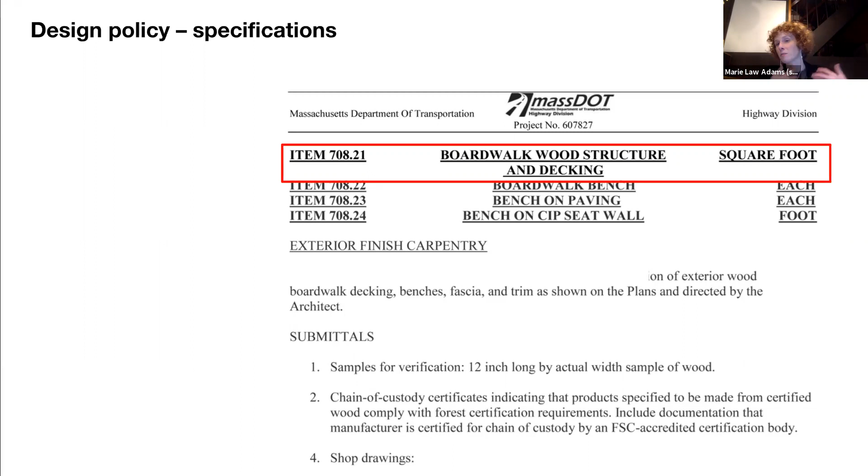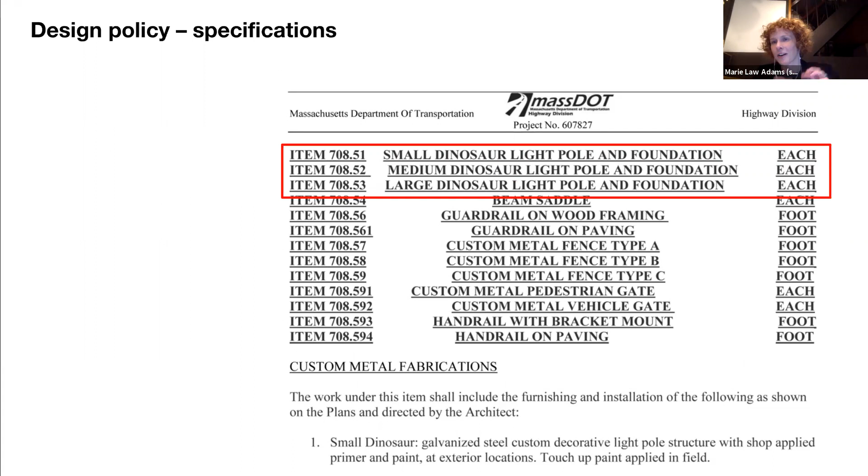We were really proud that we got something called dinosaur lights incorporated into the state's specification book. These lighting fixtures were meant to break down the scale of pedestrian crossings underneath the highway, serving as a multifunctional lighting environment and scaffold for art installations, usable not only in this space but in other under-highway spaces throughout the state.

I'll close with a project—all of these are longer term projects that take multiple years to realize. This is a project we started in 2017 called Charlesgate, and we're still working on it.

To talk about some of the politics of design, this is a really significant and interesting site: the Emerald Necklace Park system in Boston, one of the most well-known park resources in the United States, designed by Frederick Law Olmsted, who founded American landscape architecture. This is one of his seminal works, the other being Central Park in terms of renown.

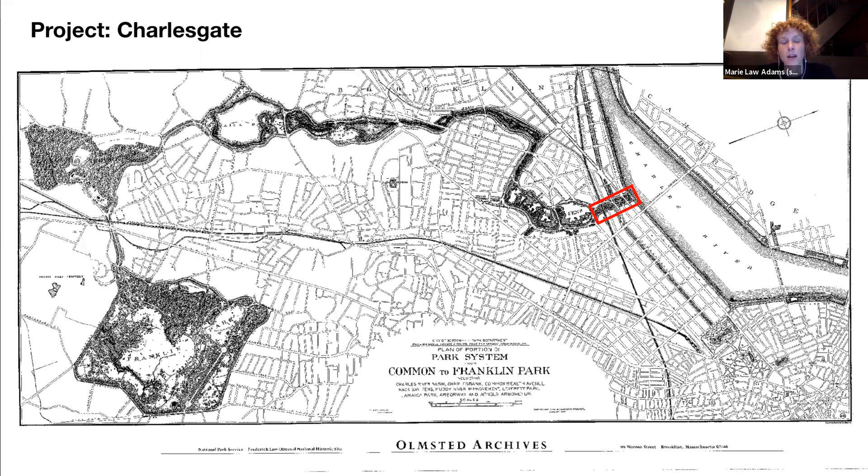The area we're working on in Boston is in that red rectangle, which was the Beacon Street entrance to the Emerald Necklace. It's an important point in the city, at the intersection of this Olmsted Park system, the Esplanade Park system along the river, and the Commonwealth Avenue Mall, another well-known park system in the area—the culmination of all of these together.

When it was first designed, it was a really idyllic landscape, a series of pond-like basins full of vegetation, with Victorian-era buildings and so on.

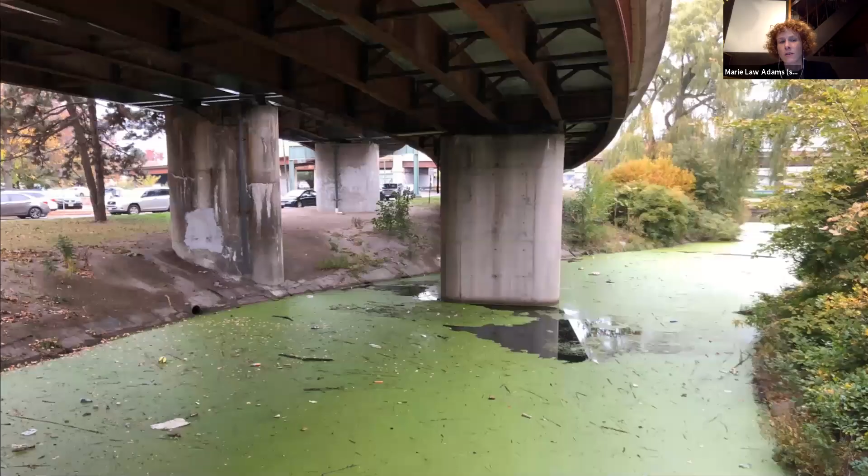This is what it looks like today. The Muddy River is not a very healthy water system. In the back of the image, all the drainage from the overpass drains directly into the river, bringing pollutants with it. There's a lot of waste floating on it, and duckweed blooms—the green here—which is an indicator of an unhealthy river.

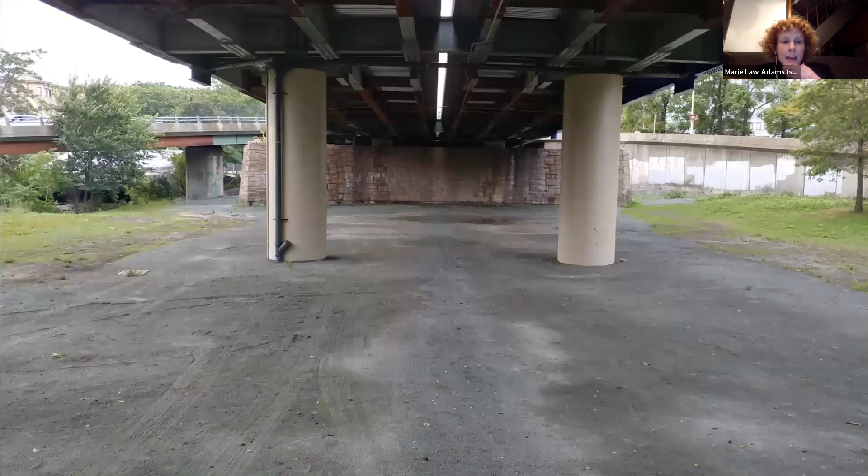This is what it looks like on land. It's very uninviting—there are no amenities, furniture, or pathways, nothing that really supports human experience or use of the space. So we developed a plan for the space with a local community and a parks conservancy, in partnership with the state recreation group.

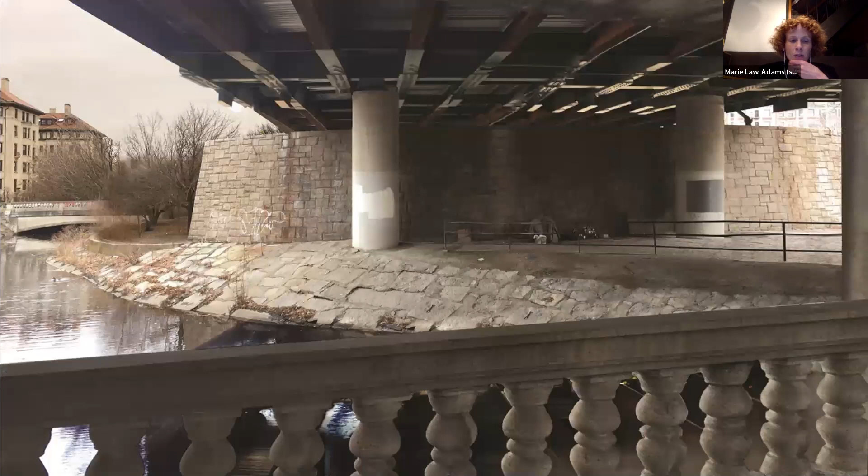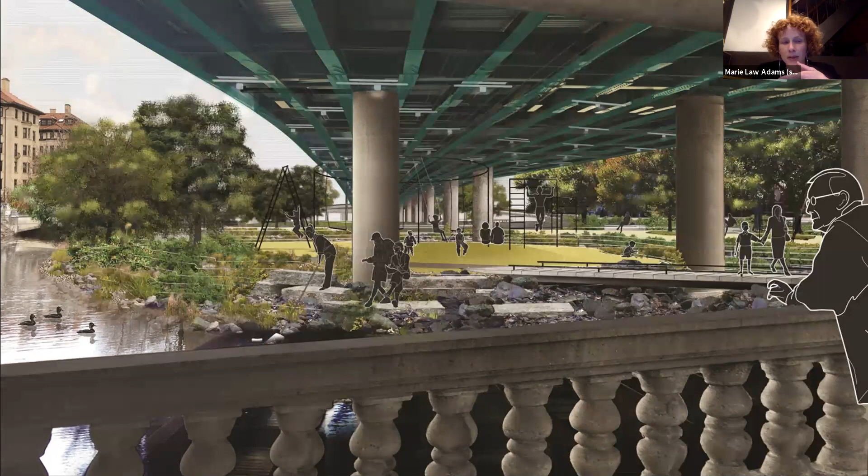These are some images we developed of the design, to give you a sense of the space. This is what it looks like today—some really large granite walls were built at the time of the overpass. We're looking to bring those down, open up the space for recreation, and naturalize the riverbank edge.

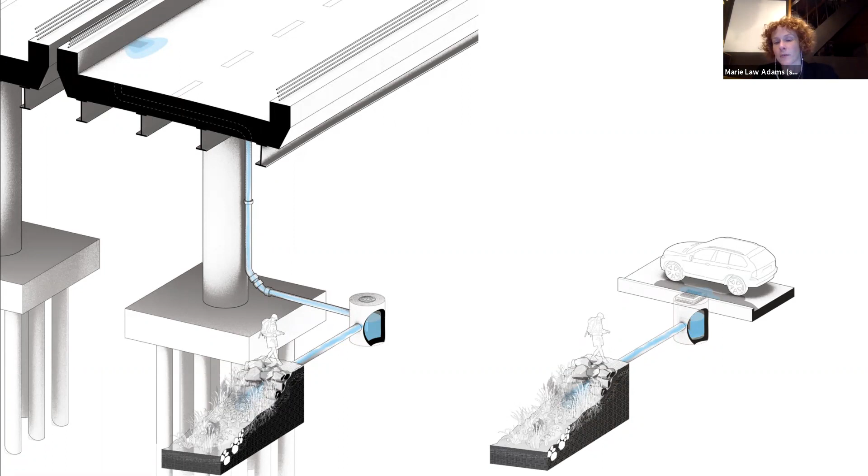We're introducing a stormwater management landscape again, learning from the previous project I showed, using the landscape feature or treatment as a park feature. And then another image here.

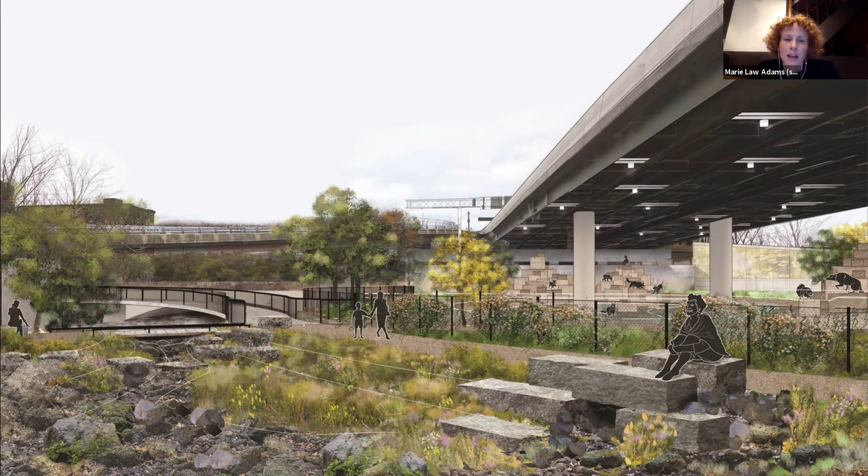I won't go into much detail on this project, but I want to close with the design politics—again, the question of getting all the different parties involved to agree on a way forward. Many of the challenges of infrastructural and industrial landscapes are exemplified in this image, a drawing we developed to forensically trace all the drainage infrastructure that ran underneath this park.

The reason we had to do that is because this park, in the center of Boston between two really vibrant neighborhoods, is never used. Thousands of people going to Red Sox games pass through the area, and the Boston Marathon goes right through the center of the landscape, yet there's no use of the park at all.

It's really not something that serves the local community, and a big reason for that is it's owned by multiple state agencies. That's what you see in this diagram here. Every single color is a different combination of jurisdictional agencies, both state and local, and every time they combine and create a new mixture it's a new color. So the water really exemplifies this complicated pattern of ownership.

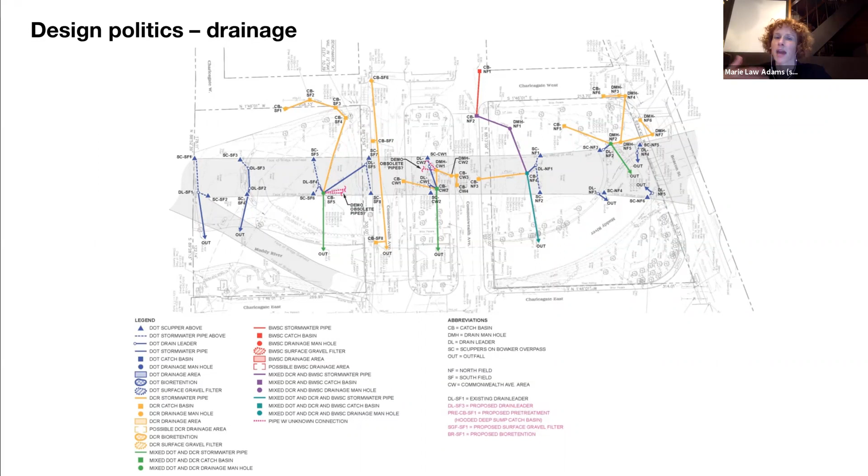This drawing exercise here is the design drawing, and I'll read it to you. Basically, the takeaway is that the new stormwater design is trying to simplify all of the different combinations of ownership. The state agencies all wanted separate stormwater management landscapes, so you can see in this drawing there's only 3 colors, whereas there's 7 colors in this drawing. So there's much less different combinations. We've sort of untangled all of the different ownership issues.

And they do this for accountability, for being able to monitor and understand what kinds of inputs they're putting into the river. But this drawing, I would say, took our office a total of 4 months to put together, between doing field work, coordinating with surveyors, trying to understand what was underground, what was no longer there, looking at historic drawings, and then working with the engineers of all the different state and local agencies to figure out what their vision for the space was.

We couldn't take forward any of the design work that we wanted to do and that the community wanted to see there in terms of bringing in public access until this kind of infrastructural piece was resolved with them. So I think what I want to say about this is that the process of drawing, or being able to put such a complex condition on a piece of paper for everyone to look at, was really the key to unlock a new way of thinking about this space that has been held in a real sort of holding pattern of not serving anybody very well for over 50 years since the construction of the overpass.

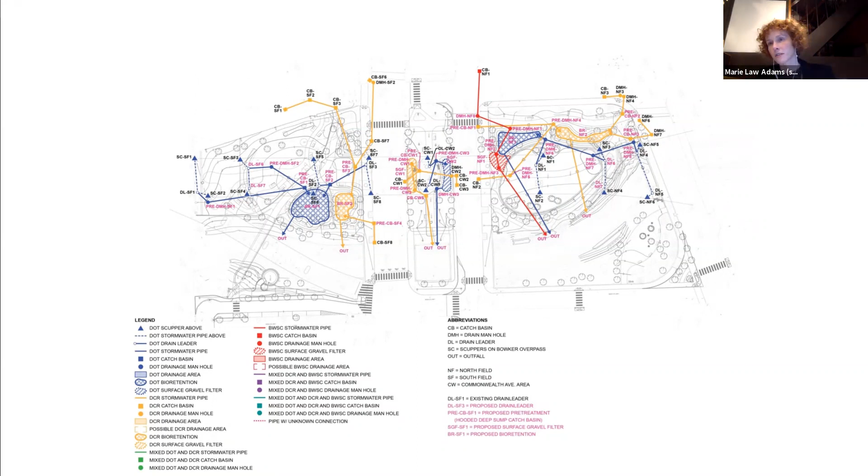So that's what I wanted to end with. I want to thank you again for having me here and letting me share my work and the work of Landing Studio, and I would be more than happy to discuss anything or answer questions.